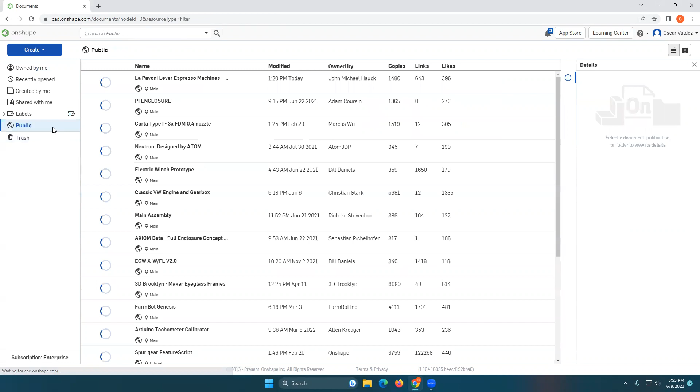We're going to talk about how to assemble a simple lever on OnShape. So creating a simple machine. I went ahead and created this lever assembly lab for everybody. I made it public, so you should be able to go to public and find a lever assembly lab, and it should come up. When you open it up, it will ask you to make a copy on your end.

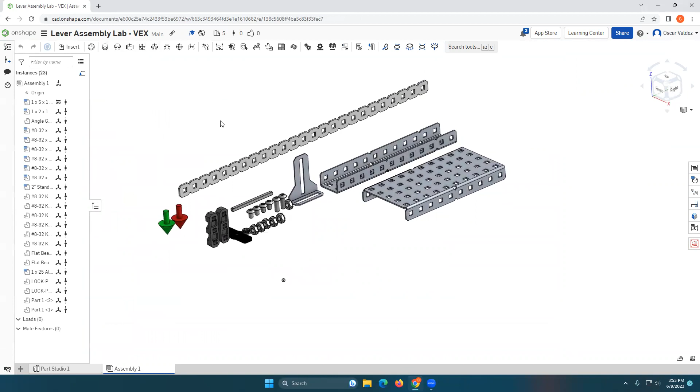For me, it did not because I am the owner. But you can make a copy to your OnShape account, and from there you can go ahead and start assembling this lever system using these VEX components that I've laid out for you already. So what I'm going to do is head back to my library, and I'm going to modify a copy of it and walk you through the process of

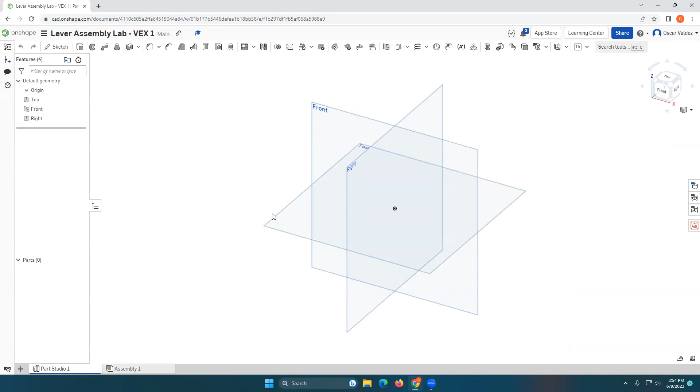assembling this simple machine. If for some reason when you open it up, it looks like this and you're wondering, well, where is the stuff? I don't see anything here. Well, click on assembly one and it should be here. Okay. This was created using the VEX parts library.

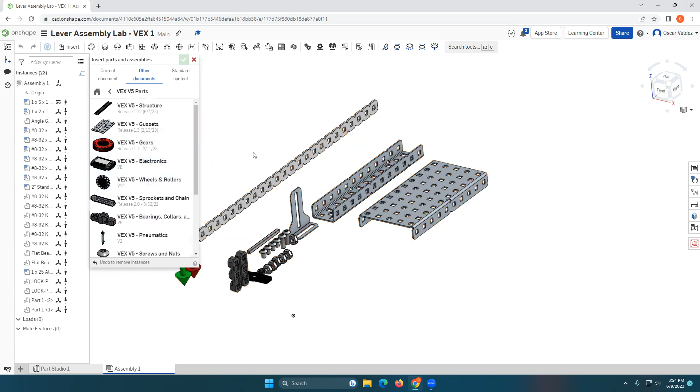You could add your entire library to your OnShape as well, so that when you go to insert and go to other documents, you can go to VEX V5 parts and you can add any VEX V5 part to your assembly should you so desire. Okay. So I'm going to go ahead and make a simple lever. I'm going to make a first class lever. I'm going to prop it up on this C channel here.

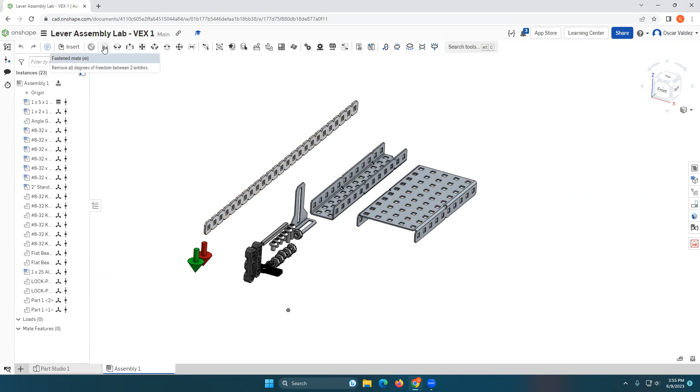So I'm going to start off by clicking my fasten mate. In fact, most of my assembly is going to be built with fasten mates. So I'm going to select that. And I'm going to come in close and select the surface. And then I'm going to select the surface of this here. It is on the wrong side. So what I'm going to do is I'm going to flip it.

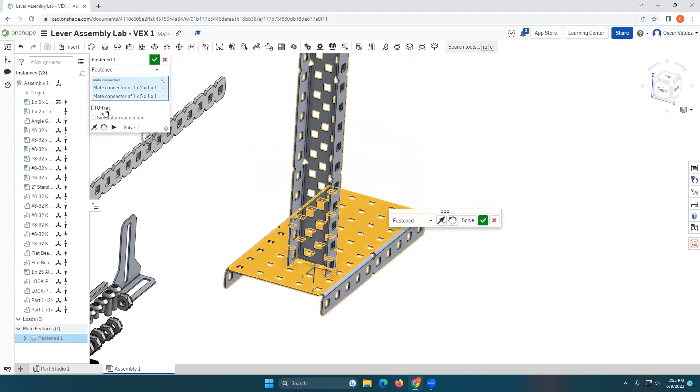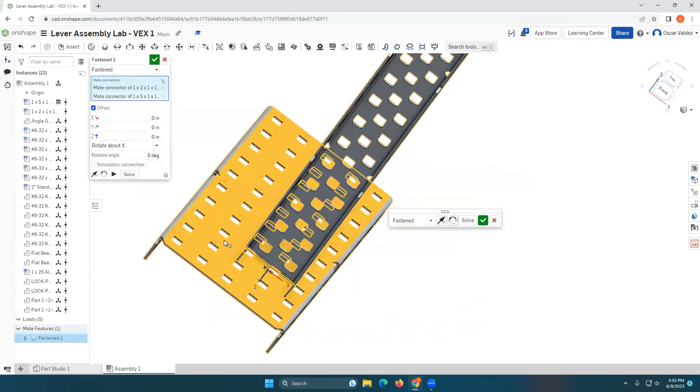And then I can play with some offsets here to position this where I'd like for it to be. Okay. It is oriented the way I want because I'm going to place my lever kind of off the side here. And I'm going to use this gusset plate to fasten this C channel to this other larger C channel, my little base plate here. So I'm going to leave it in the orientation, but I'm just going to shift it. I may find that I need to shift it a little bit more so I can put that gusset plate in the right location, but I can come back and address that if I need to.

So initially, it looks like my Y direction is along the length of this C channel. So I'm going to position this over about 1/2 inch in the other direction. So I'm going to change that to a -0.5. Actually, I'm going to center it. So let me go -1, maybe -1.25. And we'll run with that for now. I may have to adjust that later on. So I'm going to click OK for now, and I'll move that if I need to.

But as you can see right now, as I click on this, I can no longer move this component. You click on some of the other components, you can move them around. And I cannot move this one because it is now fixed to this larger C channel, which I'm using as a base plate. The larger C channel has been fixed, so I went ahead and fixed that for you, so it will not move. You can unfix it should you desire.

What I'm going to do next is, rather than worrying about my fasteners and attaching my C channel to the base here, I'm going to work on assembling the actual lever itself. I'm going to take this flat bearing here and I'm going to mate or fasten this. So I'm going to select that,